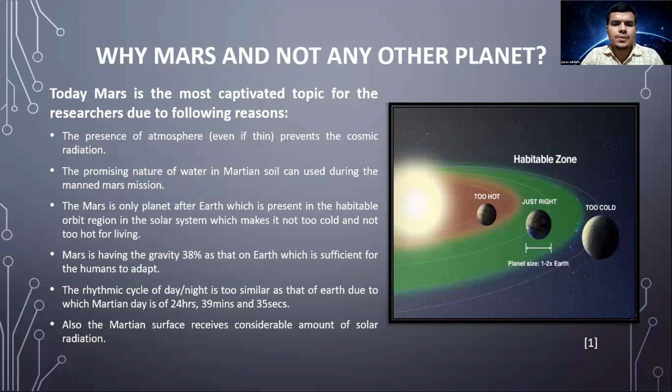So coming to our topic, next generation power for Martian life. As we all know, power is the major factor while designing a space habitat on the Martian surface. The most optimistic source of power generation on Mars will be solar radiation, as Mars receives a considerable amount of it. The direct use of solar power or a simple power generation cycle like the Brayton or Rankine cycle will not be efficient in the Martian atmosphere. The Martian atmosphere consists of around 95.32% carbon dioxide, which is where our research begins. Making use of this carbon dioxide rich atmosphere, we analyze the concept of producing energy from a supercritical CO2 hybrid power cycle, also called the supercritical hybrid Brayton cycle.

So here comes our methodology. Maybe I can continue from here for methodology. Am I audible to all? Yeah, you sound good, Hitesh. Okay, so let me explain this.

For the methodology, we will first explain the objective of our research, then what has already been done in the literature survey, and the concept for a basic understanding of how the power generation cycle and the Brayton cycle actually work. Then we will give you the data and statistics and show the analysis and comparison between the ideal Brayton cycle and the real Brayton cycle for supercritical carbon dioxide. Then we will show the solar calculations and the size of the solar panel required for the total power plant for heat addition. Then we will talk about the challenges and practical applications, and finally we will conclude.

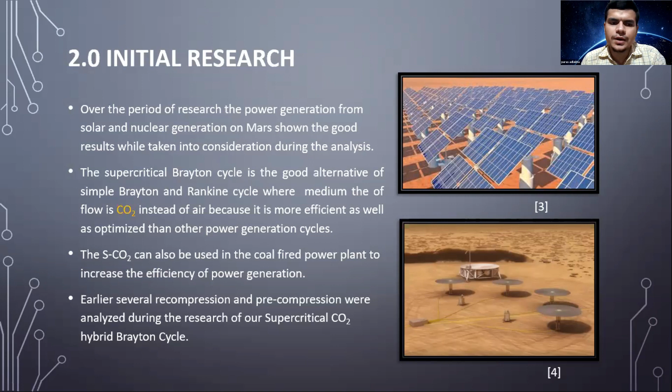The SCO2 cycle or supercritical Brayton cycle can also be used in coal-fired power plants to increase the efficiency of power generation. Earlier, several recompression and pre-compression cycles were analyzed during the research of our supercritical Brayton cycle.

So here's the data showing the Martian atmosphere. Here is the composition. As I said earlier, carbon dioxide is around 95.3% of the Martian atmosphere, and here are the atmospheric conditions. As we all know, the Martian atmosphere is around 100 times thinner than the Earth's.

The ambient pressure is around 610 pascals, which is less than 1% of the Earth's, and the temperature at 0 kilometers of the Martian surface is around 228.5 Kelvin.

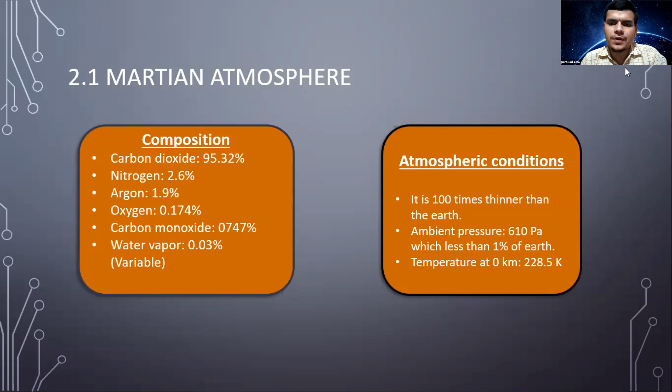So coming to the supercritical Brayton cycle, here are the inlet conditions for the supercritical CO2 cycle. The pressure required at the inlet is around 7,377.3 kilopascals, and the temperature is 304.1

Kelvin. The density of CO2 is 1.98 kg per meter cubed, the specific heat at constant pressure is around 0.8312 kilojoules per kg per Kelvin, and the gamma value of CO2 is around 1.2941.

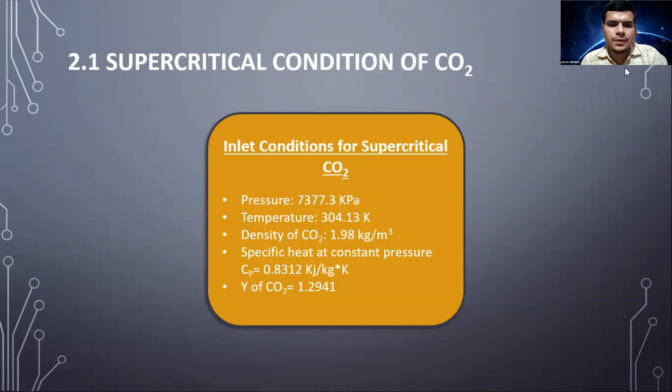So coming to our concept of the next generation supercritical Brayton cycle, the supercritical Brayton cycle will be used to produce the power required for a space habitat or any manned mission on Mars. The SCO2 cycle is used to increase the efficiency of the simple Brayton cycle.

It is assumed that the CO2 will be pre-compressed from a pressure of around 610 pascals up to the inlet pressure for the supercritical Brayton cycle, which, as I said earlier, is 7,377.3 kilopascals. It is used in a hybrid mode, meaning it will get the heat input from solar panels instead of a fuel-based combustion chamber, which is the conventional one.

The heated CO2 is passed through the turbine, which starts rotating. As a result, the power cycle begins, and from the turbine our electricity is generated, which can be used directly for consumption in the Martian habitat. In order to increase the efficiency of the turbine, we are using a regeneration Brayton cycle.

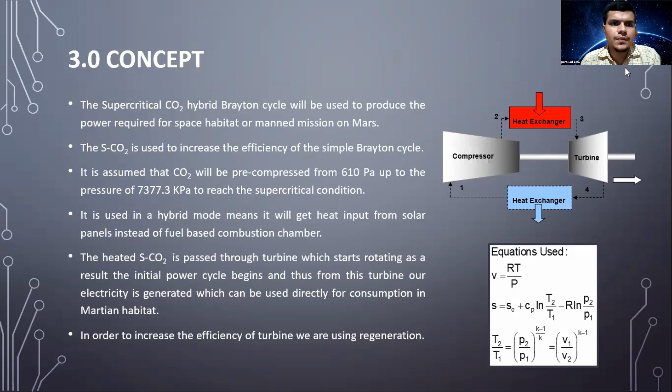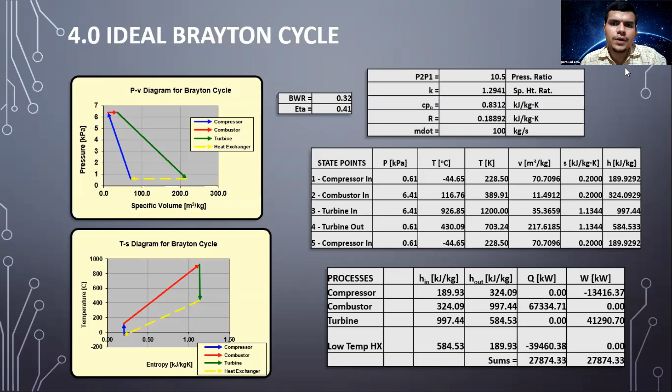So here's an ideal Brayton cycle. We have used a pressure ratio of around 10.5, and so for the ideal Brayton cycle,

Am I audible to all? Am I audible, please? So in the ideal Brayton cycle, what we are... Am I audible? Yes, you're audible. We can hear you. Okay.

So I was speaking about the ideal Brayton cycle. In the ideal Brayton cycle, what we're trying to do is initially take the supercritical conditions at the inlet of the compressor. In an ideal Brayton cycle we have three processes: first is compression, second is heat addition, and then expansion.

For compression, at the inlet we have a pressure of 7.3 megapascals for the supercritical CO2. That means at the inlet the fluid is already at supercritical conditions. So we can well imagine that when the fluid is at supercritical conditions, the turbomachinery design itself becomes a challenge because of the stress analysis and thermal stress forces it has to face, because it now has to compress a highly dense fluid.

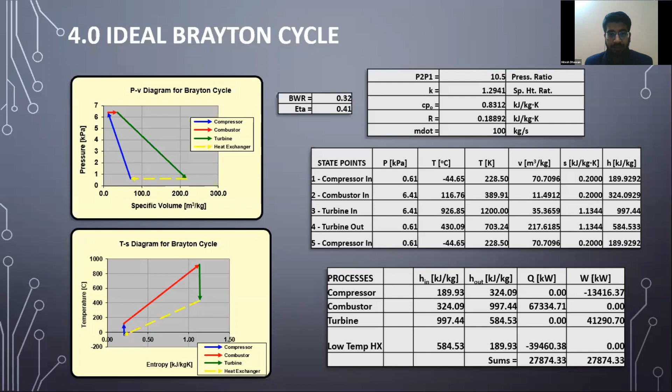So in the real Brayton cycle, the initial conditions remain the same, that is, supercritical carbon dioxide entering the compressor. And we also want to tell you that it's not an open Brayton cycle. We have a closed Brayton cycle over here, so the circuit will always be closed. Initially we need to take it to the supercritical state, but in the later cases it is not the same. We will be continuing the same fluid inside the whole cycle.

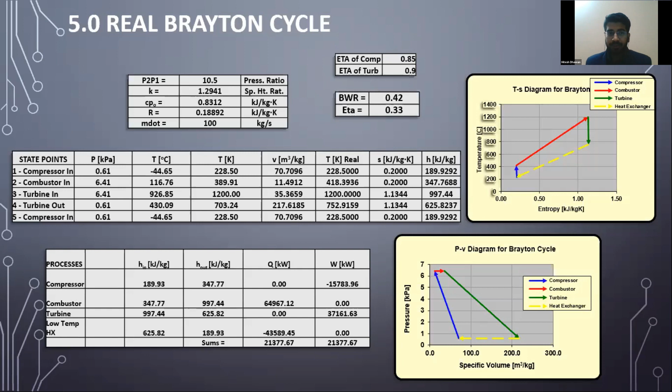Now, in the regenerative case, we are trying to add heat in separate stages, so we will be using 2 combustion chambers. First, we try to raise the temperature to a certain limit. In this case, we enter the supercritical fluid again and raise the temperature to 926.85 degrees Celsius. Then when it exits, due to expansion the temperature decreases. Again, we try to raise it up. This helps us in increasing the overall efficiency of the system.

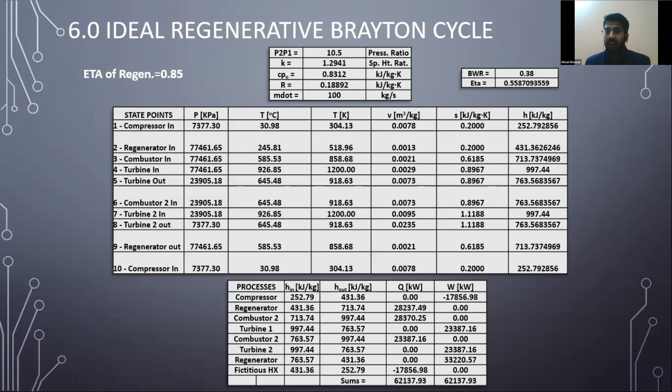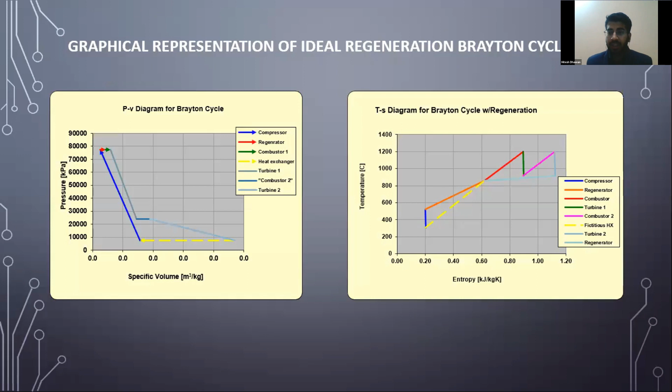As a result, the overall efficiency, which has already increased by using the supercritical fluid, and by configuring it with the real regeneration cycle, we get better results that can be seen in our graphs. From here, on comparison from the ideal Brayton cycle to the ideal regenerative cycle, we can see a significant increase in the efficiency.

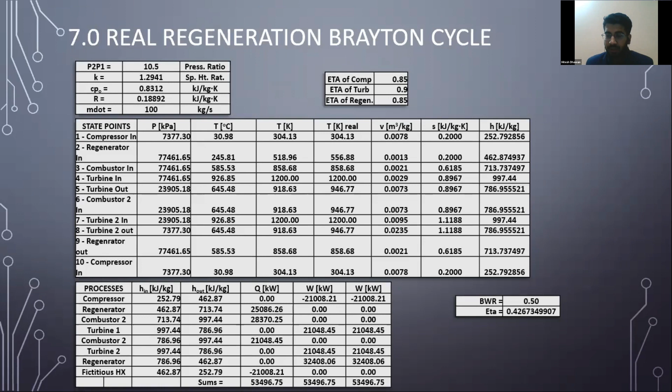Then, by inculcating the losses also, like the losses in the compressor because of flow separation and viscous forces, the overall regenerative cycle will have a little less efficiency as compared to the ideal case. But still, the real case is way better, because by using the regeneration cycle, we are trying to keep the temperature in the fluid nearly constant or linear while we add the heat.

Now, as we can see in the graphs, for the PV and TS curves, in our case, what we are trying to do is...

Tash, we have about 5 minutes. Okay.

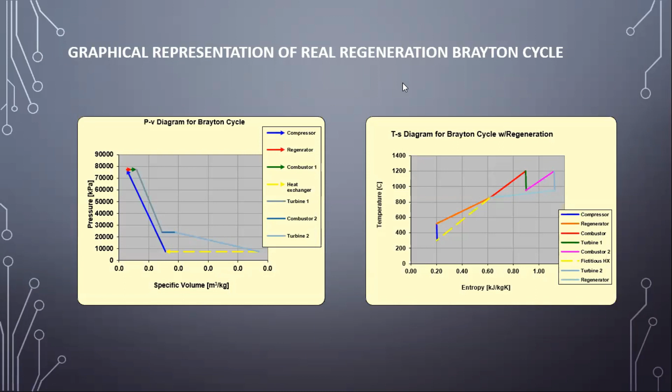So we are trying to compare these cycles with the initial cases. And then we are trying to calculate our solar value. Solar calculations are done by calculating the power rating, and we are using the SunPower Maxeon 3, having an efficiency of 22.6%. As a result, we came to know that in order to generate the average space habitat consumption of around 170 kilowatts, we will be requiring an area of around 1276 square meters of solar panels.

Now the challenges, as I explained in the beginning, are about the turbomachinery design because of the stress analysis, thermal analysis, and the flow separation. And again, we have to achieve the supercritical state, which itself is a challenging task initially, though it is easier as compared to the steam cycle or Rankine cycle.

In conclusion, we can tell that because we are using solar instead of any other fuel like thermal, we are not burning any fossil fuels. On Mars, we are using the same carbon dioxide that is available outside. So it is highly eco-friendly for us, because in the space habitat we are not consuming all the resources; we are using the resources of that planet only. We don't have to carry it from Earth.

And then the size of the power plant has reduced significantly as compared to all other cycles. So yeah, I would like to conclude. Thank you.

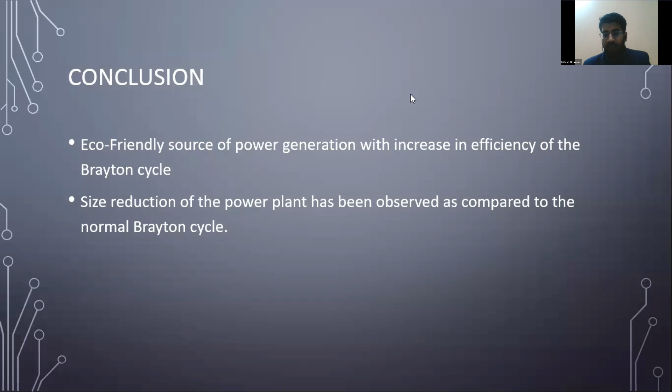I would like to add on that. I have mentioned the turbomachinery in the challenges, as you can see. Whenever we try to design turbomachinery for the compressor, we generally try to use a turbo alternator compressor, because here we have to compress an already compressed gas that is already at 7.38 megapascal, okay?

But we are gaining advantages; each time we have pros and cons for the same thing. The gains are more in terms of the efficiency the system will achieve later on, once it has started running. Initially, we have to spend some energy to raise it to the supercritical state. Compared to the nuclear option you mentioned, when you set up a nuclear system there, you will have to spend a lot of power, because you have to take a lot of precautions for that also.

In this case, you don't have to, because in comparison you have to take into account all the factors. And in our case, we are getting a significant size reduction, so it will be comparatively compact compared to a nuclear power plant or anything else. Further, if you are solely dependent on a solar power plant, like the photovoltaic cells you mentioned, it won't help in that way.

It won't help us particularly because the efficiency is very small. You would have to set up a very huge solar array there in order to fulfill the requirements of the space habitat. Further, you have to maintain it regularly. In our case also, but we are using it as a heat exchanger, and we are using the solar radiation to the maximum extent possible. That's why we have used what is available in recent research.

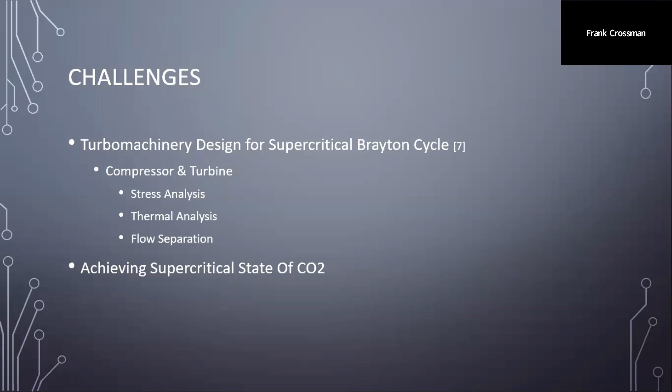Okay, I've got a question. Okay, well, thank you very much. Understand. I just got a question. Thank you for taking the time to answer those questions, gentlemen. Okay, thank you. Does anybody else have any questions? Let's see. ET says,

How do you capture the CO2 in the first place? I understand how to collect rainwater, but not air. What system will you use to do this?

To put it in very easy words, have you seen a vacuum cleaner? We are trying to suck in the air, keep it, distill it, and separate it into carbon dioxide and its separate components. Then we raise it to the supercritical state. In very easy terms, we are taking in the whole atmosphere, the air surrounding it, and then converting it to the supercritical state. I hope I answered your question.